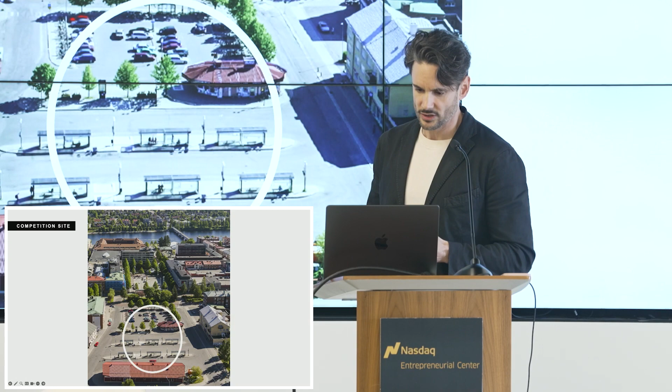The competition site was an empty plot in the city center, next to the main square and the new train station. So this was going to be the most central plot in the entire city, which now was more of a backside. But in our proposal, we wanted this to be a vibrant hub that interacted into the city.

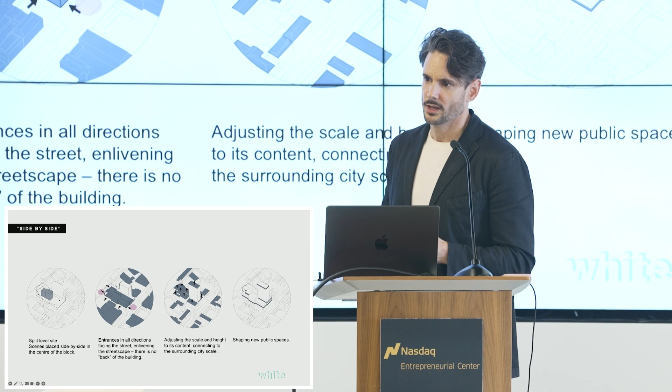So for us, this was more than just a venue for fine arts and culture. This was a cultural workshop where people could meet, a new meeting place for the people in Skellefteå, but also for people visiting Skellefteå.

The concept for this building is that all the functions get less space of their own, but they can use the entire building, so that they can use and share spaces. This is also something for collaboration, which has worked out quite well.

We're showcasing timber throughout the entire project, working with material optimization, showing how we assembled all these prefab elements, and hopefully triggering an interest in timber construction in the end. We're working with all the bearing loads vertically made from timber.

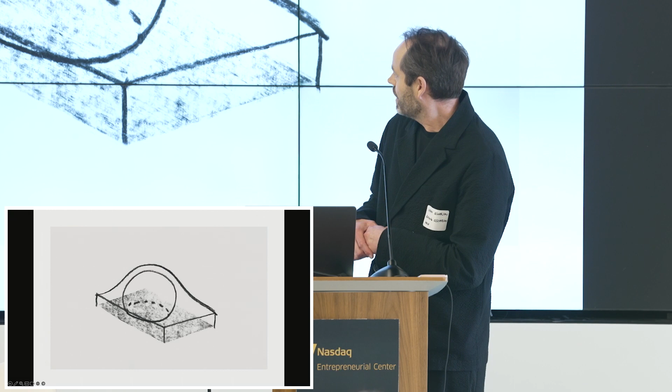Since it's a listed building, or a cluster of listed buildings, we had to be very respectful to that surrounding, so we wanted to keep the facades very low. The dome itself is kind of fixed to its size, meaning it's a fairly high volume, four stories high. So we ended up with this concept to have low facades and to encapsulate the dome inside. You will enter into this new building from the inside normally, and then you will see the whole dome.

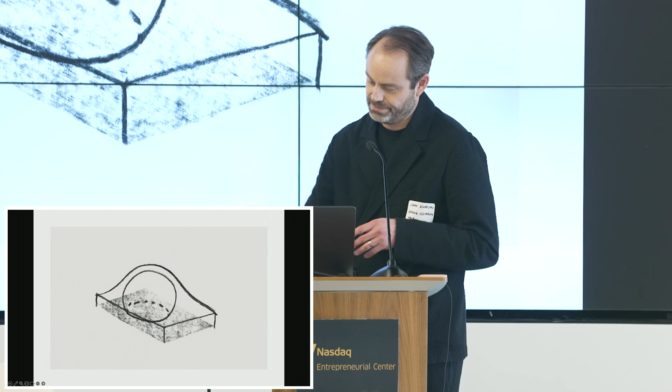To be able to construct this particular organic shape, we had to look back to learn from the history. This is a beautiful example of a fantastic structure in timber.

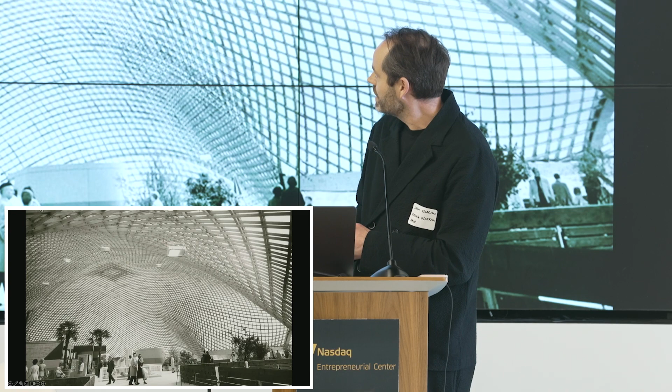It's a timber grid shell structure from the 70s, by Frei Otto, and the building is the Multihalle in Mannheim. So we wanted to do something like this, but adapt it to our new requirements.

This is just a temporary structure, that's why it's very light. So to make this happen, we had to work with the very best structural engineers and contractors within the timber industry.

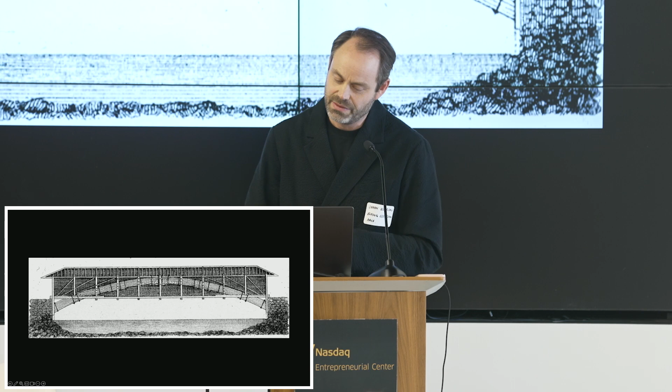We ended up in Switzerland, partnering with Blumer Lehmann, and they came up with this idea of a structural concept for this organic shape and the beam structure. This is an early example from the 18th century from Swiss structural engineer Grubenmann.

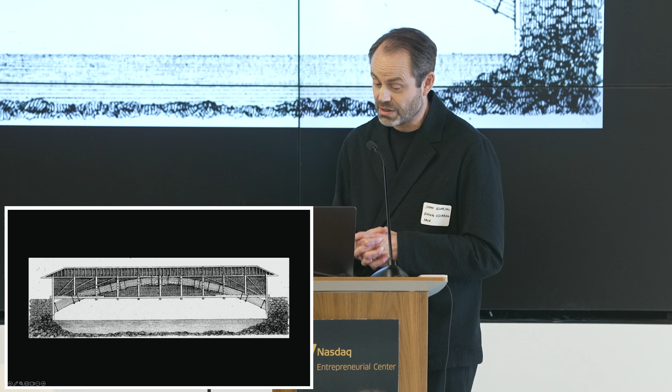The concept is using standard boards of LVL, which is laminated veneer lumber, done in multiple layers. In total, it's 25 layers of these boards.

It's thousands of unique pieces in wood, and they are all digitally fabricated, produced, and installed in this protected environment by this huge tent. So you can see all the components. This is the second layer.

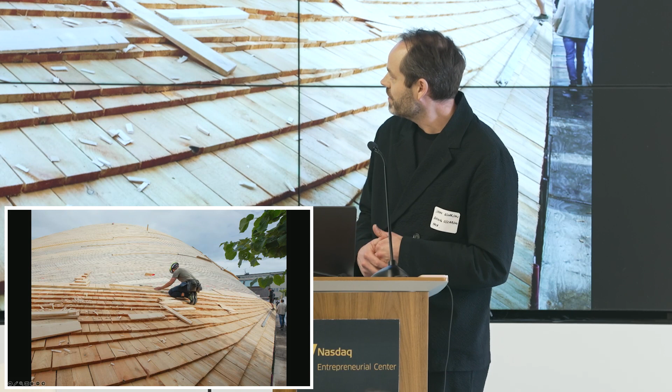But since this project was also a project to promote timber buildings, we wanted to show the possibility of the material in all different situations and applications. So even the roof is cladded in timber, and this is Nordic hard pine.

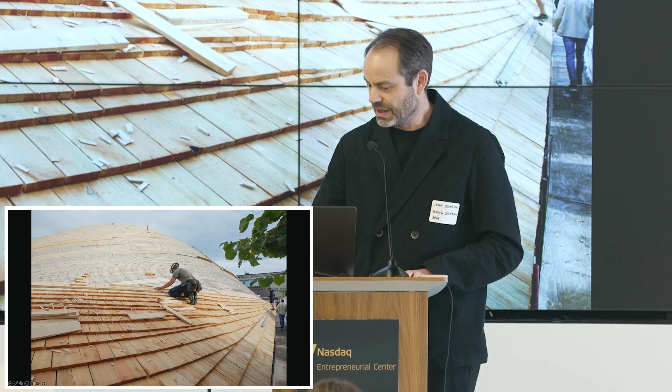It links to the traditional buildings in this surrounding area. This is an example of that. So in this respect, we link the traditional craftsmanship within the timber industry with the future of construction, timber construction.

And the last image. I don't know, what I have to say now is more like what we will talk about a little bit, what this will contribute with.

It's a technical object in itself at the Museum of Science and Technology, so you can visibly experience innovation, even if you understand it or not. I feel in real time on site that it opens doors in people's minds, and I hope it's inspiring. I feel it inspires. Maybe finish there now, yes.

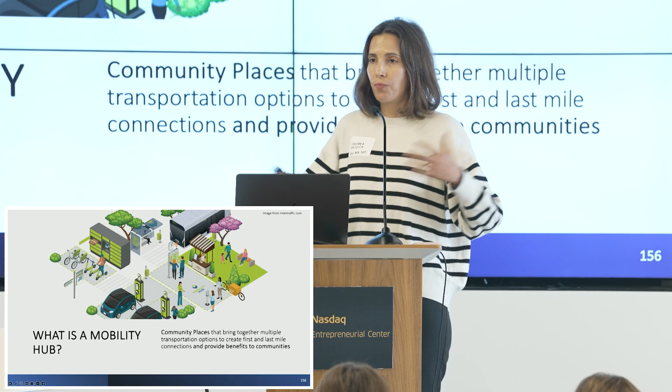But also the needs of the people that have to live with the mobility hubs nearby. What kind of hubs do we install in different urban landscapes? Is it like a super hub? Is it like a micro hub? And what kind of added amenities or services do those hubs have to have to serve a broader spectrum of members of the community?

So with that in mind, we developed some sort of typology of hubs.

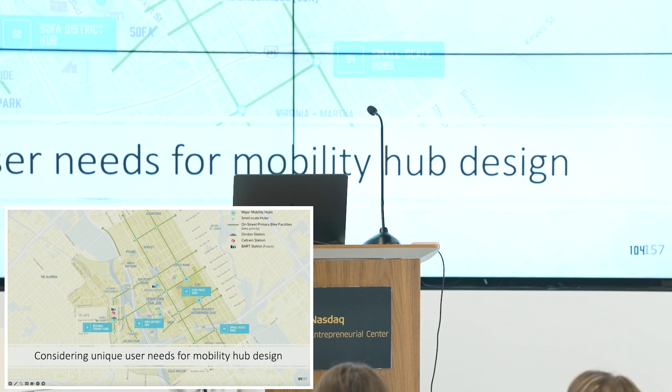Two of the main hubs that we wanted to develop first are on San Fernando Street, right across San Jose State University, near City Hall, a very downtown core area. We also thought about another small hub nearby that would connect the downtown area of San Jose with Caltrain and the BART station coming into that area, and high-speed rail probably in the future.

So we decided to go with those two hubs and start thinking about what kind of elements those hubs would need to serve communities, and how we can design those spaces in a way that really makes sense. We partnered with Street Moves Initiative and Lundberg Design Architects, and started thinking about what kind of criteria and elements we wanted to have on those hubs.

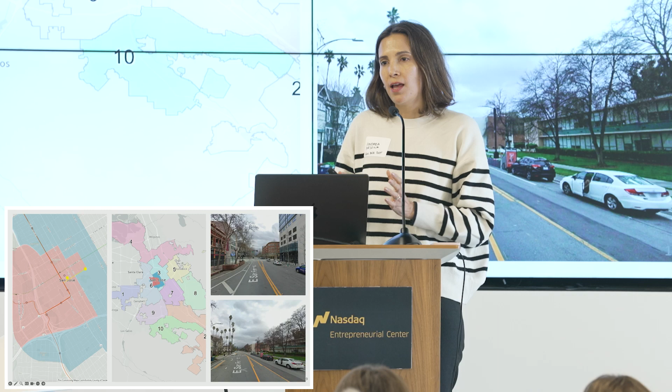This is just to give you an image of the downtown core area of San Jose. The red area is what we call the downtown core, the blue area is the extended core, and the numbers around are all the districts in the city. It's a very sprawled city, and what we're trying to do is create this pedestrian and bike-friendly downtown that we could slowly spread to other districts as well.

The city has already been exploring something we call quick build, which is a way for us to reclaim a little bit of our street space for other street users - vulnerable residents who aren't getting their fair share of space. With this, we're trying to think about how to place something that serves those communities, but can also change with time. That's the thinking behind these hubs.

In terms of timber usage, it's not a very readily available resource for us in San Jose - concrete is always easier to get. But we're trying to think about what other materials, including timber, we could use as part of those modular aspects. So maybe the platform where the hub is installed is concrete, but some of the other elements are modular and could change depending on the needs of communities in that area.